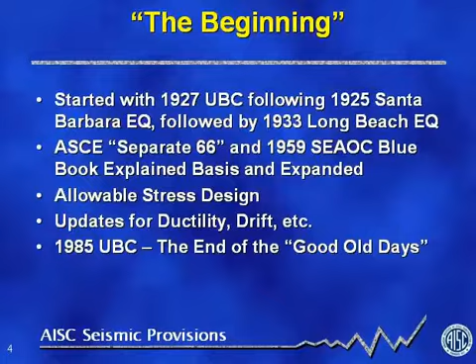So the beginnings: the 1925 earthquake in Santa Barbara came on the heels of the Great Kanto earthquake in Japan, and that led to the first Uniform Building Code in 1927. The California Chamber of Commerce actually wrote a structural code at the same time, which I thought was quite interesting. I wonder if the Chamber of Commerce would be interested in such things today.

The next earthquake was the 1933 Long Beach earthquake, which did severe damage to many school structures. It led to statewide laws in California called the Field and Riley Acts, the first documents making prescriptive requirements on the design of specific types of buildings, namely school structures. There were also the rudiments of codes developed in San Francisco and Los Angeles around that time.

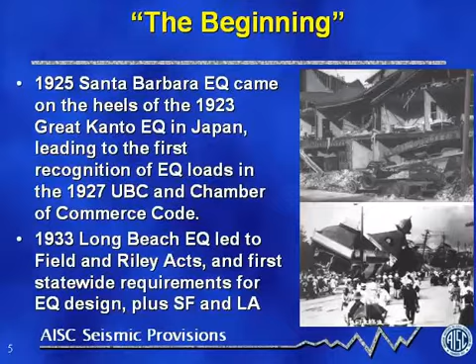The first base shear equation, from the 1937 UBC: basically, you designed your structure for 2% of the weight of the building if you were on hard soil, and 4% if you were on soft soil. And that was it.

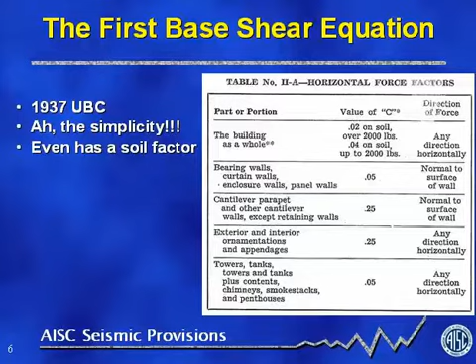Wouldn't that be nice? The other thing I liked in this is that it recognized higher forces on wall elements, cantilever parapets, and the like. And even those non-building structures had their own place in this first table.

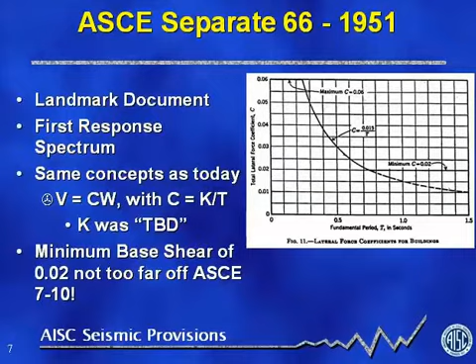And I was interested to see that they did put in a minimum base shear and said that no structure should be designed for less than 2% G. And believe it or not, we've sort of come back to the future in ASCE 7-10, and we also have a minimum design shear that's not too far off of 2% G, although certainly the shorter period part of the spectrum is much higher than this one shown in Separate 66.

So then we moved to the SEAOC Blue Book, which for many years has been a great resource guide to the reasons why the code is written the way it is, and the background for it - a kind of commentary. In the 1959 Blue Book, the first set of K factors was written into that document, and that gave us the design forces that we could use.

Bliss here was there's only 4 different factors. Right now I think we have 85 different system definitions in the building code. But then you just needed to know if it was a box structure, a frame structure, a dual system, or a ductile frame structure. That was it. And those non-building structures had their own category as well. So again, very simple, easy to determine which kind of system you had.

There were some height limits put in there to try and make sure engineers didn't go beyond what people felt were standard approaches. This was the first time that any ductility provisions were put into documents like this, so ductile moment frames were described in this document. But there were no drift provisions, so we weren't thinking about deformation yet, still just all force.

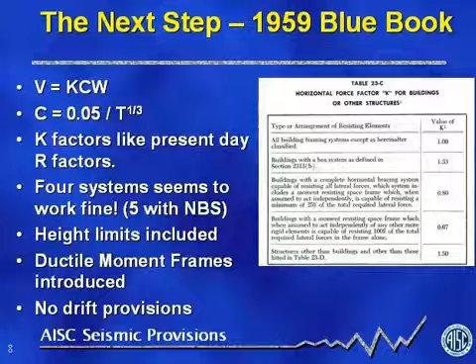So now we'll talk about a 25-year period between 1961 and 1985. Updates to the code basically brought in more and more detail to the base shear equation. We started to come up with national maps that defined the seismicity. And then in 1976, we started to see an importance factor for the first time.

This recognized that some structures we would want to be operational after an earthquake. So this may be the start of performance-based earthquake engineering, when we started to define not just life safety as our intent, but trying to define some structures that would be operational after an earthquake. We also brought the soil factor back out into the front and center of the base shear document.

And this was the first time that we introduced drift. Early on it just said 'per accepted practice' - wouldn't that be nice? This is my accepted practice for drift control. Then they started defining it as 0.005 times the height, and then using 1 over K depending on if you had a ductile structure or a more rigid structure.

Again, the length of the code then for seismic design was 13 pages, and that was on a small print document or small size document with large print. So you could learn that within a few days.

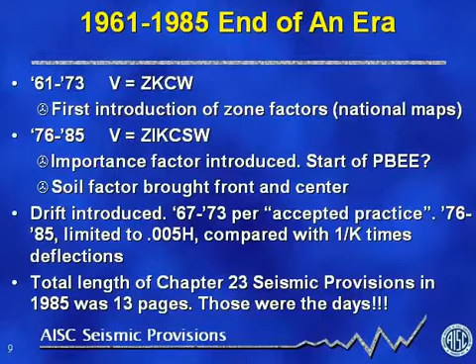In 1985, there were a couple of pages on steel design in the Uniform Building Code. There was one sentence that said, for brace frames, the only thing you had to do besides designing it using the AISC procedures was to multiply your brace frame connections by 25% over what the member was designed for.

Again, trying to recognize the start of recognizing that connections shouldn't be the place where we get failures in steel structures. Ductile moment frames had one page. We had some definitions on what materials were to be used, what to do about plastic design, the concept of designing for full capacity of the members and the connections, or demonstrating a ductile displacement connection approach. There was another about half a page on non-destructive evaluation and testing, so recognizing the importance of quality control in those structures, and that's it.

Now 1985 isn't that long ago. It's only 25 years ago, but as I think you'll see in the next set of slides, we've come a long way since then.

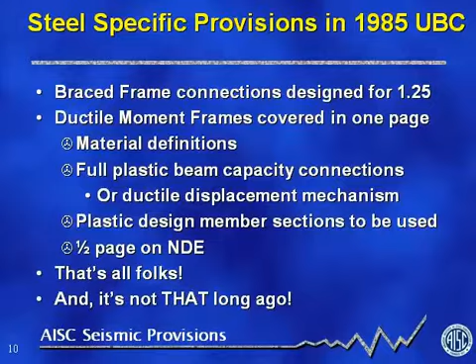So we'll talk about the recent past then, the last 20 or 25 years or so. ATC 3 was the landmark document that came out in the late 1970s that sort of set the basis for all the modern codes we're working with today. And we can trace back the majority of what we've done to ATC 3.

The 85 NEHRP provisions developed by the Building Seismic Safety Council and the 88 UBC started to incorporate that information into their documents. We switched from allowable stress design to a strength design basis. R factors replaced K. We started to put in uniform hazard for ground motions, and then started this proliferation of system definitions. This is when that all started to jump into the fray, with the idea that we needed to be very specific about our different systems and the kind of performance we wanted to get out of them.

This was the first code where a capacity-based approach was introduced, and that was for the eccentric brace frame system, where we had a rational approach to making sure that we could follow a capacity design, and I'll talk a little bit more about that as we go forward.

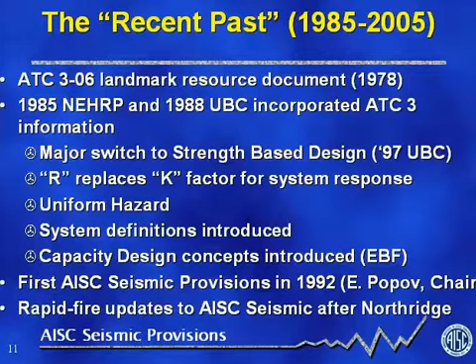In this time frame as well, as Charlie mentioned, AISC put out its first edition of seismic provisions as seismic sort of made its way across from the West Coast to the rest of the United States, and Professor Popov was the chair. After the Northridge earthquake, we sort of rapid fire tried to update the provisions as quickly as possible. We actually made three updates between 1997 and 2000, and then another edition in 2002.

So we were trying to update a lot of the research that was going on, the testing and the development of new information, and get it in the hands of practitioners as quickly as possible so that we wanted to make sure that you were doing the best job that you could as soon as possible.

We now are fortunate, I think, that we have one set of provisions that covers the entire United States for seismic design. So in the old days, there were three kind of competing codes, and there were different standards, and people did things differently. Now, if you're designing a seismic structure wherever you are in the United States, you're pretty much going to be using the seismic provisions.

So let's get into the meat of the presentation then, and that's the 2005 and 2010 seismic provisions of AISC. As I mentioned, 341-05 is incorporated into the 2006 and 2009 IBCs, as well as ASCE 7-05. We just completed ASCE 7-10, and that'll be in the 2012 IBC.

In the slides that are coming, what I'm going to be showing in white is what's in the 2005 provisions, so that's what should be on your desk right now. And then in that goldenrod color, it will be what I call the coming attractions of the 2010 provisions. So trying to get you to think about a little bit of what the committee was working toward to try and improve the provisions the next time.

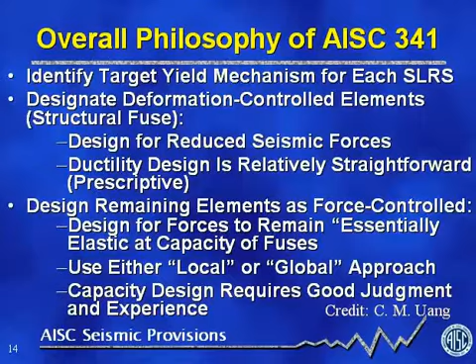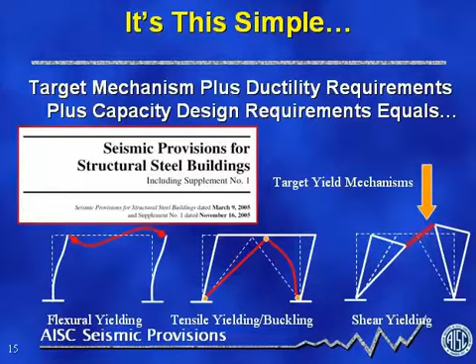Okay, let's go through and summarize the basic elements of the 2005 provisions. It's broken up into two parts. The first part covers structural steel. The second part covers composite construction. It's generally intended for seismic design categories D, E, and F. And if you hopefully work with ASCE 7 as well, that's sort of the areas of higher seismic demand throughout the country, depending on occupancy and location, etc.

It's very well coordinated, we think, with ASCE 7-05. We've tried to bring together all of the research that's come out of the FEMA SAC project to make that happen. One of the things, parallel to AISC 360, we put this into what we call the unified specification format, where both the load and resistance factor design and now allowable strength design are both in the same location. So we've got those into one set of provisions, so you don't have two sets of kind of competing provisions.

Talk a little bit about the major changes for 2010. We've reorganized the document to be more consistent with AISC 360. So you'll see parallels when you're working with the main specification and AISC 341 that you probably wouldn't have seen previously. One of the major things I think that's going to help with some of the transparency of the document is the system definitions and approaches, and the way they're dealt with are very consistent for each of the systems. I'll get into that in a little bit.

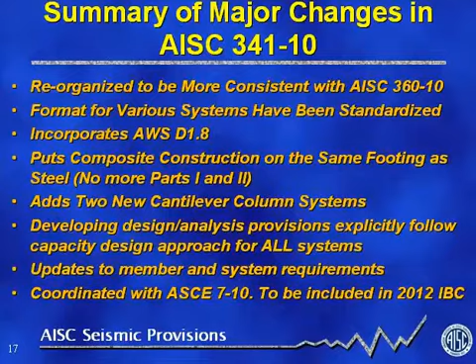Okay, let's talk about the scope and general requirements. It's generally intended and developed for buildings, but we also have language that talks about it being applicable to building-like non-building structures. What that means is structures that have vertical frames and horizontal diaphragms that deliver load to vertical frames in a way similar to buildings. There are other structures it doesn't apply to, like transmission towers and tanks, which you have to go elsewhere to deal with, even though they do have steel in them.

There's a glossary that develops the concepts of the entire system. It's not just the vertical frames, but also horizontal diaphragms delivering seismic load into those frames, collectors and chords, etc. In seismic design categories A, B, and C, the lower seismic zones, if you had to design here in Florida for seismic, you're in seismic design category A. If you wanted to use AISC seismic, you could, but you also have the choice of using the main specification with an R equals 3 and not going through all the provisions I'm going to talk about here.

In most cases, I think that's going to be the wise choice. The benefit of using the seismic provisions in categories A, B, and C is that you use a higher R factor, so your force levels are lower, and potentially your member sizes are smaller, but not necessarily a cheaper structure to build. In 2010, what we did in the scope area was develop clearer documentation about how we coordinate between ASCE 7 and the seismic provisions.

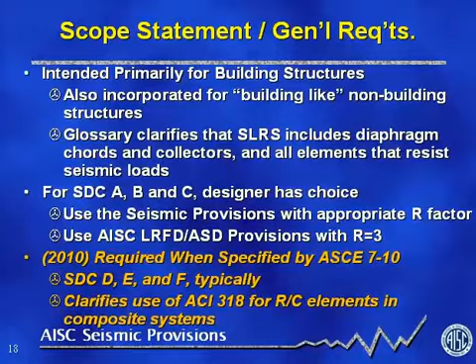We're clarifying the use of ACI 318 for composite systems that have reinforced concrete elements in them. On general design, we refer to ASCE 7 for height limits, seismic design categories, story drifts and the like. In the 2010 provisions, we did a better job clarifying how to use the amplified seismic load provisions that you have to apply in certain elements of the system, to make sure we get that capacity design approach taken care of.

We also talk about how to approach the required strength on every element in the system, whether it's required from the analysis of the system based on ASCE 7-10, for your ductile elements, or if it's from the capacity-based design approach where you define a capacity of your ductile elements and then apply it to the rest of the system that's supposed to remain essentially elastic.

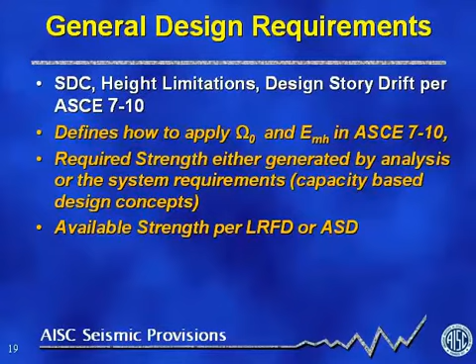And then some more definitions on how to apply LRFD and ASD.

One of the things that was a major step forward in the 2005 provisions were the requirements on project documentation. This was an area that AISC 360 has now followed up with in the 2010 edition in their Chapter N. The idea that we really need to do a better job of documenting, whether it's a design drawing that I put together as the engineer of record, or the shop drawings that the fabricator puts together to validate that he's understood the intent of my design. Same thing for the erection drawing.

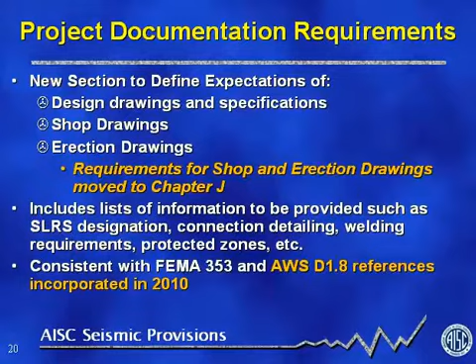So there's a specific list of items that need to be included in the various documents to make sure you've covered everything in your presentation, so that hopefully that will eliminate any misunderstandings between the various parties, or as many as possible, and hopefully improve the quality of construction that gets put into the field.

So let's get into the spec itself, talk about the materials. Basically, any material that's covered in AISC 360 is pretty much allowed in AISC 341. Steel is a ductile material, so we really haven't seen the need to put too many restrictions on the basic structural products. One of the things we have done, again, this concept of capacity design is so important to us, is that we need to work not just with minimum specified strengths, but expected strengths of steel.

So if you're a grade 50 material, that's a minimum. The expected capacity of that—the mills are going to make it a little stronger—so when they do their certification tests, they don't have to chuck a whole heat of steel.

Usually in most materials for structural wide flange shapes, the yield is maybe 10% higher than minimum, HSS maybe 30 to 40% higher than the minimum yield. We also use the tensile strength to get the expected tensile strength. The reason we need this is for defining the capacity of those ductile elements. We need the real capacity, not the minimum specified capacity, in order to properly design the rest of the system to make that fuse occur when the earthquake hits.

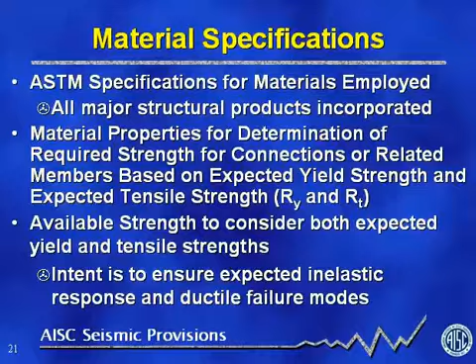So we talk about available strength, etc., trying to ensure we're getting ductile modes of failure. For heavy shapes and plates, we have requirements on Charpy V-notch toughness of the base materials, similar to what was developed in AISC standards for large truss elements in the 80s. It's a little more restrictive than those basic requirements for Charpy V-notch toughness on the thicknesses, but it's just something we need to check when we get to very large members.

In 2010, we expanded the allowed use of steel beyond grade 50 to grade 65, which has become more common in column shapes, etc. And then, referencing the AISC or AWS D1.8 for filler metals, we can now put that material all in their document.

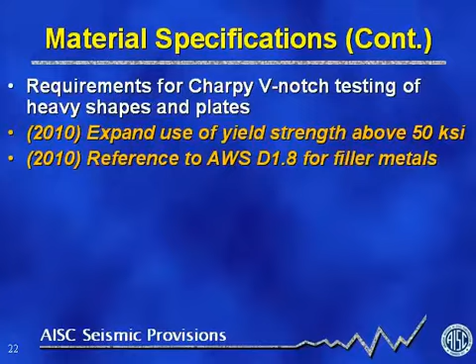So we'll talk for a couple minutes about connections and joints. In bolted joints, generally we're looking at fully tensioned high-strength bolts for Class A slip-critical preparation of the joints, but designed for bearing. So we're designing them for bearing but preparing them for slip-critical. You probably ask why would you do that? The idea is the recognition that in smaller earthquakes, we don't want a lot of slip in the connections, so that's why the slip-critical preparation, but recognizing that when we get to that major earthquake, the bolts are going to slip into bearing, so let's take advantage of that complete strength.

We also don't allow sharing of load between welds and bolts in the same line of action. This doesn't mean an entire connection can't have welds and bolts, just that if you have one force, you can't have bolts and welds sharing that force, because there's deformation incompatibility there that you'll never be able to add together at the same time. Generally standard size holes, although we can use oversized holes for braces to allow ease of erection and construction.

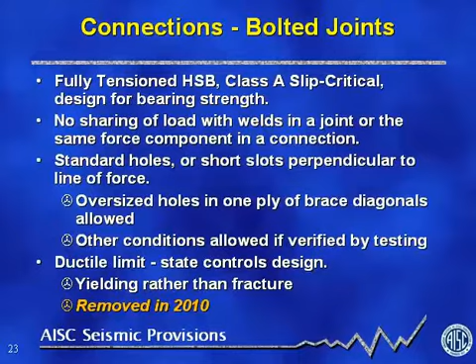In the 2005 provisions, in addition to designing the connections generally for the capacity of the connected member, we also required you, kind of a belt and suspenders idea, to demonstrate a ductile limit state. So when you went through and checked all your limit states, you couldn't have a fracture type limit state, you needed a yielding type limit state. This basically, in some cases, required even an additional safety factor on top of the capacity design. We've removed that in 2010, so we've actually made it less restrictive. We will do that if we think it's the right thing, and I think that will make it easier on many connection designs, especially those that use bolted connections.

Let's talk about welds for a little bit. In 2005, we didn't have AWS D1.8 yet, so we had an Appendix W that covered a lot of the material that's in D1.8 related to how we weld, what we do with backing bars, etc. We were able to incorporate that in 2010 using the AWS procedures. There's things about welding procedure specifications and continuity plate detailing, etc., that help us provide the ductility that we need.

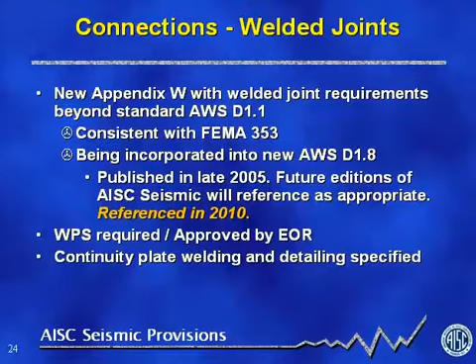Welded joints in seismic frames all have to have demonstrated toughness in their welds. Every weld in a seismic system needs a minimum level of toughness. Right now we're at 20 foot-pounds at 0 degrees. This came out of the FEMA SAC research. For very special welds, called demand critical welds, which are right next to areas of high inelastic demand, we require something called a demand critical weld. Those have two levels of toughness specified, one at 0 degrees and then basically 40 foot-pounds at 70 degrees, which again came out of the SAC research in the 90s, to demonstrate a level of toughness up at this sort of service temperature of the structure. That's now all taken care of in the D1.8 provisions in 2010.

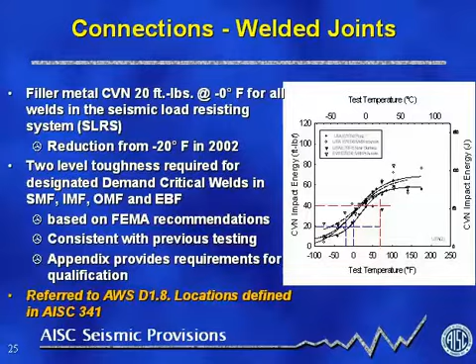The other part of welded joints I want to talk about right now is the protected zones. And again, think about those hinges I showed in the target yield mechanisms.

Those are the areas that we're going to be straining well beyond yield, 4, 5, 10 times yield strain in some of those locations. We need to make sure those are going to be there and perform for us. So what we've done is said these are like no-fly zones, if you will. You need to be careful not to disturb the steel in that area, let it do its job and perform with that ductility.

So we've said you can't have anything like an attachment for a curtain wall or shot pins for a metal deck. The only thing you can do is put in some small spot welds to hold down the deck for OSHA requirements. The figure in the upper right is the top flange of a beam tested at Lehigh with a composite deck, showing a fracture that went right through the entire top flange, right next to the shear connector that was placed inadvertently over the middle of the plastic hinge region.

So we want to avoid that if we can. And if you do end up with that in the field - and I think many of us who have done these kinds of systems have run into places where the plumber didn't know there was a protected zone and just went through and hooked something onto the structure - we have to work with the contractor on getting those repaired properly.

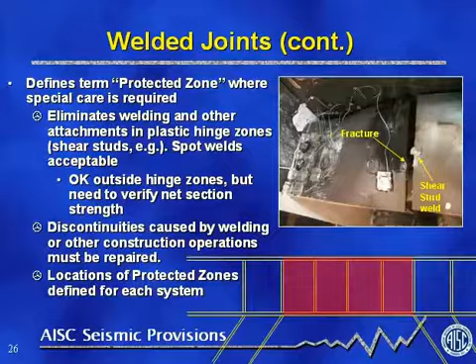Talk a little bit about members. The width-thickness ratios are often more strict than the main specification for members in seismic systems, and I'm going to talk about that with this slide.

This shows the graph of the moment capacity of a section as you go from right to left, from elastic buckling to inelastic buckling, and then peaking out with plastic buckling. Below you can see a chart of ductility and how that varies with the width-thickness ratio of the member.

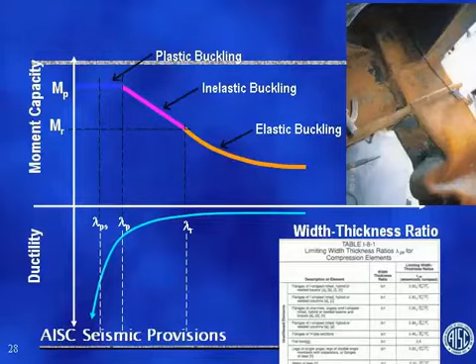So with seismic design, in those ductile elements, those deformation-controlled elements, we're really focusing on pushing ourselves as far as we can down the ductility curve. So we use lambda PS, which is less than lambda P, the plastic limit, the break point between plastic buckling and inelastic buckling. We use three different levels in the seismic provisions to recognize that.

In 2010, to try to make it more transparent, we came up with the terms moderately ductile and highly ductile elements. Your highly ductile elements are going to be in the high ductility systems with the high R factors - those elements that are going to be plastic where the plastic hinges are. So beams in moment frames, link beams in EBFs, braces in special concentric brace frames - those sorts of locations.

The moderate ductility elements are going to be part of maybe the capacity-designed elements in the higher ductility systems, and the yielding elements in the low ductility systems like our ordinary systems - I'll talk about that in a bit. We also use those terms to flag the bracing requirements, the lateral bracing requirements, to make sure we have stability of those elements, as well as the ability to form the local plastic hinge. We've incorporated new sections in this 2010 provision for HSS and box-shaped flanges, as well as composite elements.

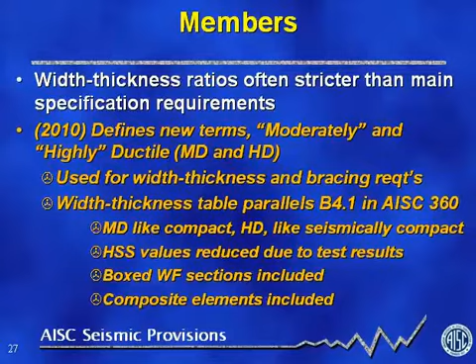The provisions also now have a small section on diaphragm design, which we hadn't dealt with in the past, making sure we're properly coordinated with ASCE 7 and ACI Chapter 22, to make sure that load transfer from the horizontal elements to the vertical elements is properly taken care of.

I mentioned bracing requirements are now uniform across the systems. This sort of fell out of every system being defined very specifically and consistently - we were able to nicely make sure we were consistent on the bracing requirements. In 2005, and this goes way back into the provisions well beyond AISC seismic, columns with high axial load were checked for amplified seismic loading conditions.

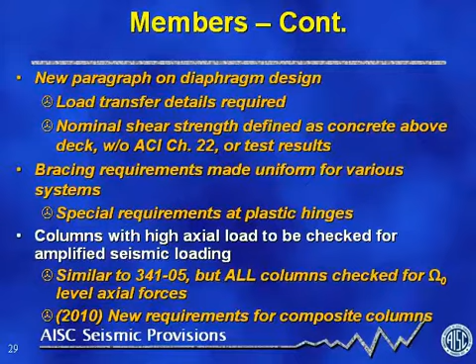In 2010, we've actually said just check the amplified loading conditions for all columns. It comes out of the computer, it doesn't matter, all the load combinations are there, just go ahead and do it that way. It's not going to change the design any. We also have those requirements included for the composites.

Column splices and bases are a very special category of connections. Obviously, one of the things you really want to avoid is any kind of column fracture or splice fracture, because if you lose one of those, you could lose a whole building with just one connection breaking on you. So it's something we were intentionally a little more conservative about than other elements in the system because of the ramifications of possibly losing one element or one connection. So we've got some very strict requirements about the use of partial penetration welds and the forces those are designed for, how you transition the welds, etc.

The other unique requirement on column splices is that all columns in the building are covered by this element. Even if it's just a gravity column, we have a requirement on the design of the shear connection of those splices to make sure that we have continuity up the height of the column. This is the only place where we deal with the gravity columns, or gravity system at all, in the seismic provisions. And the reason for that is what we found from a lot of nonlinear time history analysis is that if you incorporate or include that resistance of those columns and their continuity up the system, you get an additional strength and stiffness. It's low, not very big, but you do get an additional strength and stiffness that's not included in your design. What we found from these nonlinear analyses is that just that little additional strength and stiffness will help you to avoid weak stories where you concentrate all the inelastic demand in one floor, and you're able to better spread the load through multiple stories. So that's why that provision is in the code.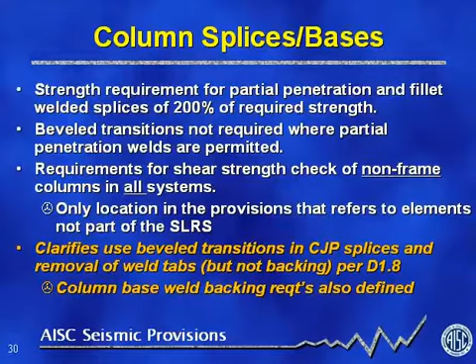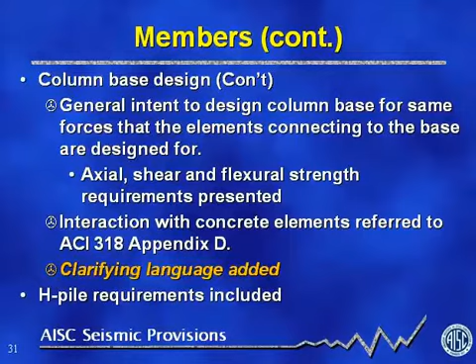In 2010, we've worked on clarifying the language a little bit and referring to D1.8, as I mentioned, and talked a little bit about column base welds. Column bases are another important design consideration. Basically, here it's fairly simple: we want you to design the base connection into the foundation, or the connection to the foundation, for the same force that the member above it is designed for. So shear, moment, axial force. This is where the interaction with ACI 318 Appendix D occurs, and there's some clarifying language there.

Another new provision in 2010 highlights the need to verify deformation compatibility of the gravity system - the ability of the gravity system to go through the drifts that we designed the building for, and make sure you don't lose gravity capacity at the design story drift. This was put in large part to include a user note, which is not part of the code, but should help engineers understand that basic shear tab connections in our steel systems have been demonstrated to go through very large drifts. So you don't have to do lots of calculations or justification in a steel building to make this provision work. But we wanted to highlight that so you didn't run into a plan checker asking where's your deformation compatibility check. Now you know all you have to do is say there's test results for shear connections showing more than enough deformation compatibility in my gravity frame for steel.

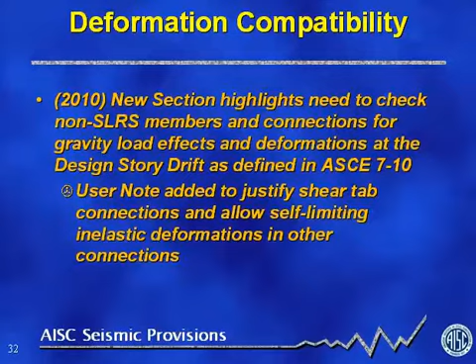Before talking about the systems, I'd like to talk about the formatting we've done in 2010, because I think it's going to help clarify and make more transparent the system definitions and the ability to compare systems across as you're trying to decide between an eccentric brace frame, a special concentric brace frame, or a buckling restrained brace frame. You'll be able to compare the different system definitions line by line and then make a rational decision. So there's a scope definition, a basis of design - this is where we're defining our yield mechanism and our protected members, or ductile members, our fuses. There's some information about the analysis you need to do. System requirements - this is lateral stability bracing, system-wide requirements, force deformation demands, the B over T limits for members, ductility provisions, protected zones I mentioned before, and then the connections - obviously a key element of any seismic design, defining the demand critical welds and splices, etc.

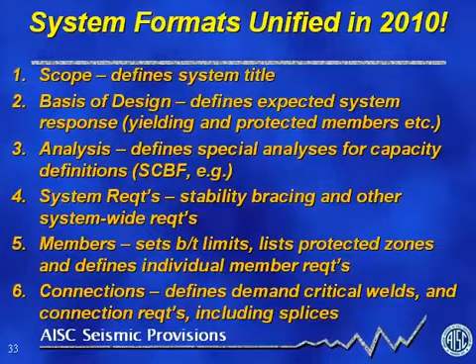The other new chapter in 2010 is a very short chapter. It's more of a placeholder - I think over time it may grow as we develop more definition here. It's on analysis. We've got some very short definitions about what section properties should be used for both steel and concrete in the composite elements, and it has a pointer to the demands or design requirements for the systems related to analysis.

There's also a pointer to ASCE 7-10, Chapter 16, which has had a major update related to nonlinear response history analysis, that when you do choose to do that in your seismic design, you're supposed to use that set of provisions to go forward with.

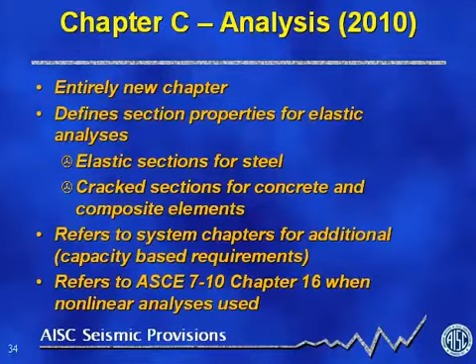So let's talk about special moment frames. We'll go through the systems now. Basically, this was the hot element after the Northridge earthquake, with the damage there. We now have provisions that require tested results on our connections there, generally to 0.04 radians for drift.

There's 3 different ways of making that happen. Either you test it for your project, or you go through an appendix pre-qualification, or you design them in accordance with AISC 358, which I'll show in a second, is a new standard that pre-qualifies a number of connections, and then you won't have to go through any additional calculations. In addition to the moment design of the connections, we need to develop the shear connection at the moment frame joints to develop those full plastic capacity of the beam at both ends.

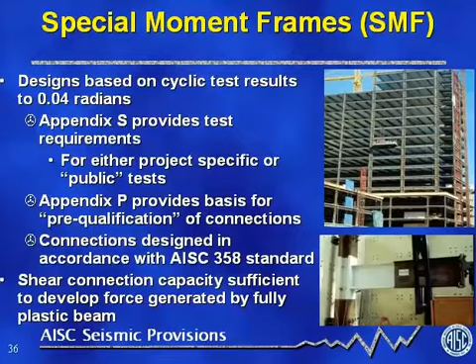A little bit about that pre-qualification standard, titled Pre-Qualified Connections for Special and Intermediate Steel Moment Frames for Seismic Applications. Ron Hamburger is the chair of the committee that develops that, and we work closely with Ron to coordinate what they're doing with what we're doing. It allows you as an engineer to pick a connection out of that document that's within their limitations of height and size and thickness and plates and the like, and submit that with no further calculations except what's required in their document to justify your design.

They're just about completed with their 2010 edition, which incorporates additional connections beyond the reduced beam section and end plates that were developed for the 2005 provision. And they're continuing to work on a number of other connections over time to get pre-qualified to make it a little easier on us.

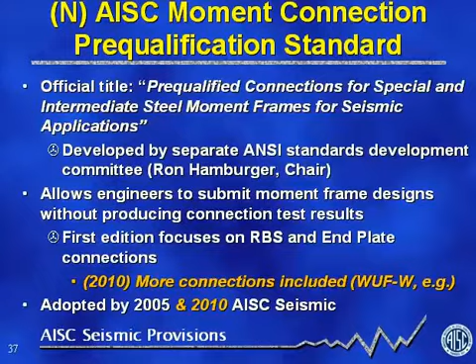Other elements of special moment frames that are important to the design, first is obviously the panel zones. We want those to be as ductile as we can be. The provisions are intended to balance the yielding in the moment frames and get some panel zone yielding as well as beam yielding. We want to spread the yielding as much as we can to take advantage of the ductility of the steel.

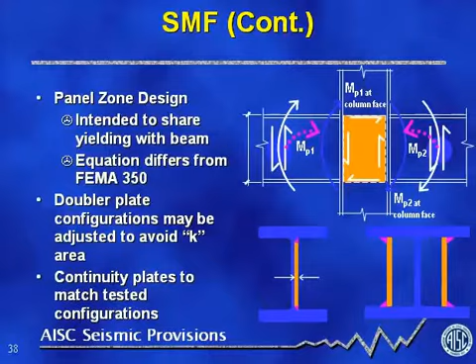So there's requirements on how you calculate that, how you put together your doubler plates, either against the web or separated from the web. And there's detailing requirements that tell you how to provide that ductility of the system.

Another major element for special moment frames is our strong column weak beam check, again wanting to avoid weak stories that are going to concentrate the inelastic deformation in one story. We check that on a column by column basis, so it's sort of an indirect check of weak stories. In 2010, we've done some clarifications to the language to make sure that you check the columns and reduce their capacity for bending by the axial force induced by the amplified seismic load.

So again, if you're doing that for 2005, you may want to think about the fact that the axial force in that is going to be higher than what comes out of the standard building code requirements.

Column splices in moment frames, we've really pushed toward CJP welds, complete joint penetration welds. The reason is the little graphic at the bottom left is sort of a simple portal frame where the inflection points are sort of near mid-height of each story. And your splice usually is going to be a couple feet below that, so you think, well, maybe the demands on those splices are not going to be that great. Why would you need complete joint penetration welds?

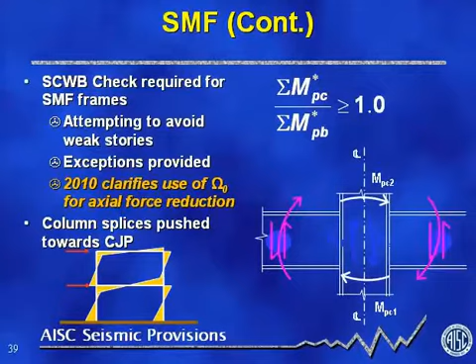Well, what we found, again, from these nonlinear response analyses is that in real ground motions, the plastic hinge is moving up and down within a story kind of all over the place during the ground motion. In some cases, you don't get any plastic hinge over a full column height, so in those cases you could get quite large moments approaching the full capacity of the column. That's why we've been fairly conservative, again, because of the potential impact of losing a column connection.

Lateral bracing of beams - obviously, if we're really pushing these moment frames hard and wanting to get a lot of ductility out of them, we need to recognize that we need to brace them laterally so we don't have any stability issues. So the requirements are for both bracing along the length of the beams as well as at the plastic hinges.

The force at the plastic hinges is quite large, about 6% of the capacity of the flange. So think about AF, AS, FY on the flange and multiply that by 6%, then try and push that back into your diaphragm - it's something you can't ignore. It's a big number. You need to keep connections out of plastic hinge zones.

Unfortunately, that wasn't properly communicated by the design engineer. They put the lateral brace right in the middle of the plastic hinge, so not really the best idea, especially since it's a protected zone area.

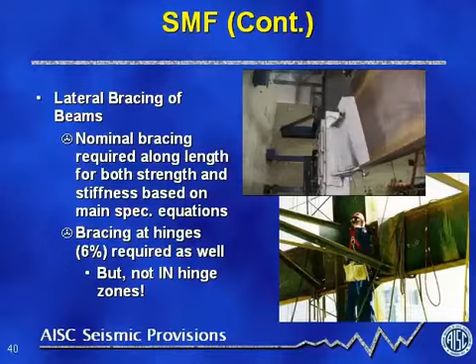Generally, you want to move those lateral braces about one flange width beyond where you think the end of the plastic hinge is. The other couple of standard moment frames are intermediate and ordinary. The provisions on those are less restrictive, primarily because the code doesn't allow you to use those in all applications.

So there are height limits and weight restrictions on those structures. We reduced the connection requirements for the intermediate down to 0.02 radians, with moderately ductile members instead of highly ductile, which we use for special moment frames. We now require demand critical welded splices, again for the reasons I've mentioned.

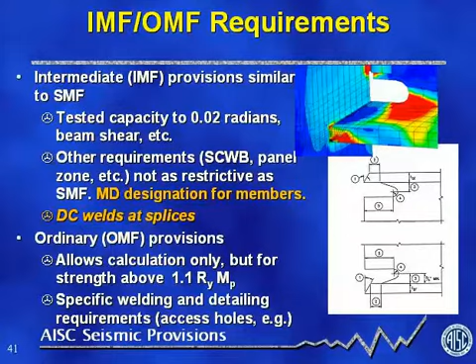Ordinary moment frames you can actually use without any connection tests, so you can do it by calculation. Again, very limited applications for those - one-story buildings, very light buildings generally. If you don't use connection tests to demonstrate your capacities or deformation capacities, we have a set of detailing requirements that includes access hole configurations like the one I showed, which will help avoid premature fractures in those connections.

Another moment frame is the special truss moment frame, conceptually very similar to eccentric brace frames, with the ductile special segment shown in the middle of the bay, the frame on the upper right. You can do it a couple different ways, whether it's a crossed diagonal with light plates or a Vierendeel approach. We've limited the application of these, based on tests, to spans of about 65 feet and truss depth of about 6 feet.

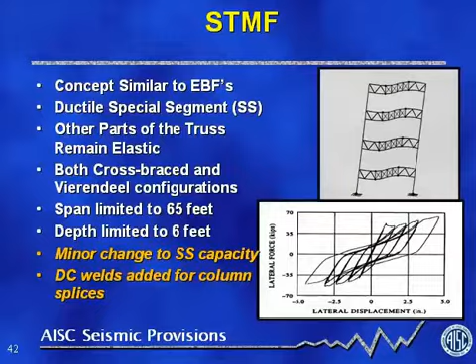We've added 2 new systems to the document, short additions for cantilever columns. These again came out of ASCE 7-10. There have been cantilever column requirements or definitions in ASCE 7 in the past, but we haven't really dealt with it in AISC. We felt it was important for clarity to do that now.

So we have an ordinary and a special system, with requirements on axial loads, B over T limits, and connection demand requirements for the special system. Pretty simple if you do have those cantilever type column structures.

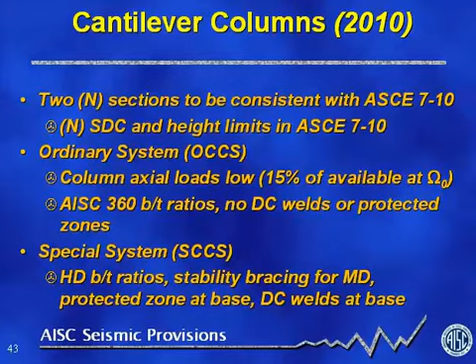Let's talk a little bit about brace frames. First one is special concentric brace frames, which is a fairly ductile system, usually in the R=6 range. There are some basic requirements for KL over R to make sure we've got good stiffness in our braces, but not too stiff. B over T ratios are quite strict on the braces, since those are our ductile yielding elements.

And there are connection requirements - obviously we don't want the connections to fail, so they're designed for the tensile capacity of the sections. We've got requirements on chevron and K-bracing. Basically, we don't want K-braces where the braces come into the center of a column between floors, because of the potential out-of-plane force that could be induced into the columns.

The chevron braces are shown on the lower right there, and the idea is that when the compression brace buckles, the tension brace still wants to pick up additional force because it hasn't yielded yet. So there's a downward pull on those beams, and there are requirements in 2005 about how you design the strength of those beams to take that unbalanced force from the compression and tension braces.

In 2010, we actually put in this 2-level analysis, which I'll talk about in a second, and increased the requirements on the connections at the brace frames. The reason we've done this is that we recognize, from analysis of these systems, that the real rotations and displacements you're going to see in these connections are well beyond the elastic level - we're talking 2-3%.

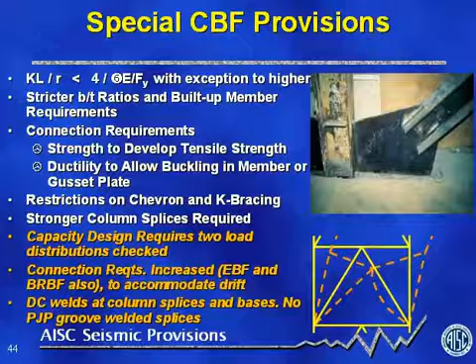And again, we've upped the requirements on demand critical welds on the column splices. So let's talk about this new analysis requirement, because I think it's an important conceptual thing to think about when you're thinking about concentric brace frames.

In the past, you would only have been required by the code to look at the analysis distribution of forces on the left, where you're elastically analyzing the frame for the forces that come out of the building code, and in compression and tension, basically the forces are going to be very similar. So if you looked at a 2-bay brace frame like this, it would tell you that there's no axial force in that center column, and no uplift on that center column, maybe in your foundation.

But think about the reality of nonlinear inelastic design for seismic. If we do overload those braces, we're going to buckle the compression braces, and those tension braces are going to try to continue to pick up load and continue to resist that force and resist the displacements. So what we've done is said you need to also do an analysis that recognizes that after buckling of those braces, you're going to get a reduced capacity in compression for those braces. And you're going to get this unbalanced force at the various locations where braces intersect.

So the residual capacity of those braces we define as 30% of the original compression capacity, and that's based on a lot of test results and looking at the kind of requirements that we put on KL over R and B over T. So in that case on the right, now you look at those unbalanced forces, and now you have quite large forces in that center column. And the distribution of force is completely different, not completely, but very different from what it is on the left if you take the forces through the entire frame.

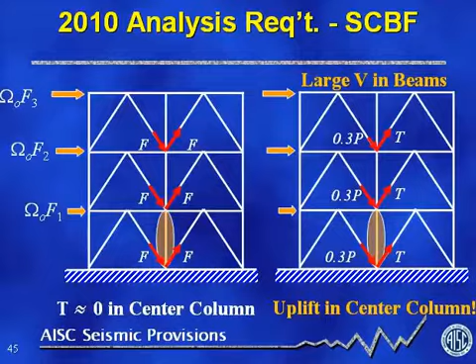Okay, we'll go to the less ductile brace frame, ordinary concentric brace frames. These are limited for use in high seismic design categories. Again, low-rise systems, 1- and 2-story buildings primarily.

Connection strength is generally based on the amplified seismic force. We've gotten some clarifying language in 2010. There's restrictions on compression or chevron bracing similar to the special frames. We do allow tension-only braces in some applications for these systems, and that will allow you to do penthouses and the like with rod braces if that's appropriate. And again, no K-bracing is allowed in 2010.

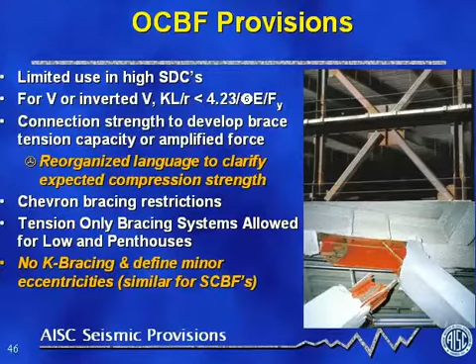We also define that you can use minor eccentricities in the connections if that's going to make the connections more efficient, but obviously you'd have to take those eccentricities into account in the member design.

Eccentric brace frames, again, I mentioned a couple times, primarily done using a capacity-based approach. Identify those link beams, design the braces and columns to remain essentially elastic for those capacities. Generally, you're going to be using shear links, links that yield in shear, and they're going to have some pretty extensive stiffening requirements, again, to provide the ductility that we think we need.

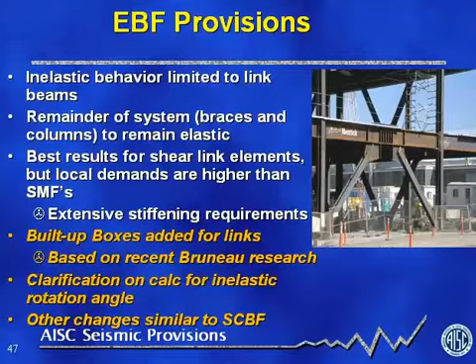In 2010, the big changes were to bring in some work that was done at the University of Buffalo by Michel Bruneau on built-up boxes, and to clarify some of the calculations that are done for displacements in the system, and some of those similar changes on column splices.

In the EBF provisions, we also have requirements on connections where the link is adjacent to the column. We sort of frown on that because you are going to get some very large demands there if you do have to bring your link into the column, like the slide on the upper right, or the picture on the upper right. Generally, we're requiring that you have connection tests to demonstrate your connection. Otherwise, you're required to basically stiffen the connection so much that you're basically pushing the link away from the face of the column to avoid any kind of fracture.

The beam outside the link and the columns need to be designed for the capacity of the link and strain, including strain hardening and that expected yield strength I talked about earlier. For the braces that are connected to one link beam, those are required for a strain hardening factor of about 1.25. Columns, shown graphically on the lower right, are designed for a strain hardening factor of 1.1.

So the column at the base, where it says PU, has to be designed for all three of those links yielding and strain hardening to 10% over their expected capacity simultaneously. That's going to create quite a large load. It's probably very conservative as you get into taller structures. For short structures, it seems to work fairly well to look at it this way.

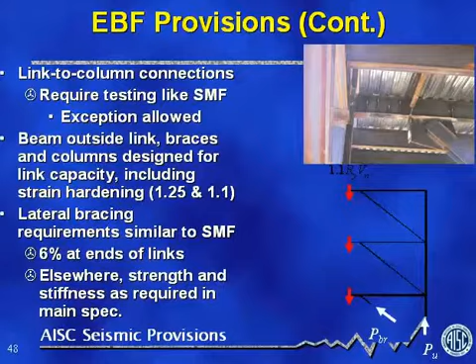Again, lateral bracing - this is a high ductility system, so we are going to be bracing laterally. At the ends of links, you get large demands like at plastic hinges and columns, so we have that 6% limit again, and then you also have a stiffness requirement as well as strength.

A new system in 2005 was the buckling restrained brace frame system. It improves on special concentric brace frames because it provides a ductile brace response, so we aren't going to get that reduction in capacity on the compression side. The concept is that the brace is within a stiffening element so that when it wants to buckle, it is restrained from that buckling by the collar around it, if you will.

If you look at the graphic on the upper right or the slide on the lower right, you can kind of see what that looks like. It was developed in Japan. They traditionally use it there more as damping elements than braces. We've chosen to use them as braces in the U.S. You basically can get hysteretic behavior like perfectly elastic plastic material.

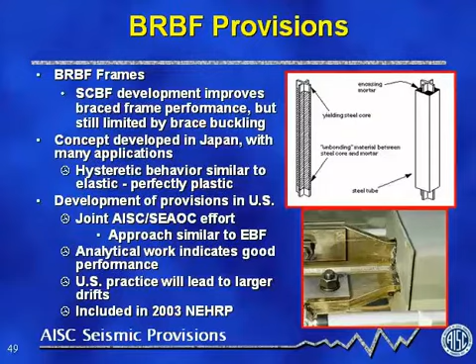This was developed in joint efforts with various committees like AISC and SEAOC and put into the 2003 NEHRP provisions as well as the 2005 AISC Seismic. Because those steel cores are such important elements, we require that they be demonstrated and tested for twice the designed story drift. There's an appendix in the document in 2005 that tells you how to do that.

There are a number of exhibitors downstairs that provide these braces where you can learn more about how that's done. It's actually interesting that in compression these braces are actually stronger than in tension. There's a little bit of stiffening that goes on in the core, so you actually need to design the compression capacity a little more than the yielding capacity in tension.

The nice thing about them is you don't have to oversize your braces for compression, so your foundations can get smaller and columns can get smaller, and you also don't have that unbalanced force effect with chevron braces because you don't get that buckling and reduction in capacity in compression.

Again, like the special concentric brace frames, in 2010 we increased some of the connection requirements for drift and the demand critical welds on the column splices.

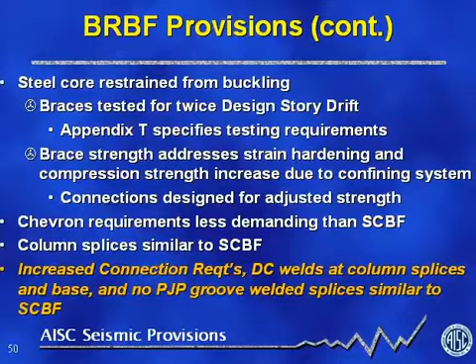The other new system in 2005 was special plate shear walls. This initially was developed in Canada. It's been in the Canadian code for a number of years based on research all around Canada by Jeff Kulak and some of his colleagues. It's also been studied at UC Berkeley.

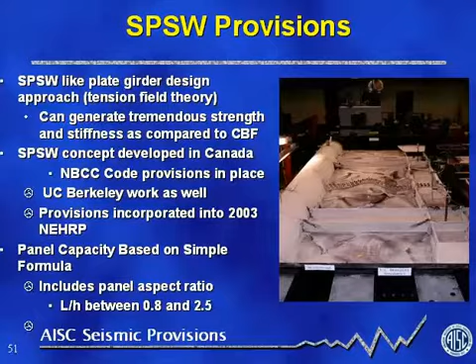The idea here is that you're sort of getting almost like a plate girder approach, very thin plates in relation to the size. They're going to buckle as this test specimen did here on the right. We required some panel size definitions in the 2005 provisions to make sure it was consistent with the tests. We also require that you put boundary elements around any openings to make sure that you're getting yielding and ductility in the plate and not in the surrounding elements.

We require that the connections of those plates to the rest of the system develop the full capacity of the web plate. And in a similar conceptual approach again for this capacity design approach, there are lateral bracing requirements for the beam. Again, you're going to get some ductility and out-of-plane deformation demand, so the strength or stiffness is needed in your braces.

In 2010, we added a couple of new elements based on some research on perforated webs and webs with corner cuts. At the corners, we saw a very high stress concentration, so there's some ideas for having a semicircular corner cut to avoid that. Perforated webs allow you to keep the capacity down.

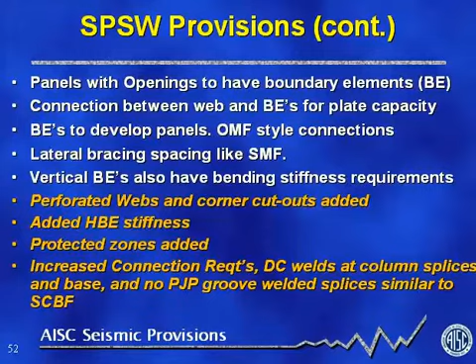We found that at reasonable plate thicknesses, you're going to get such large capacities that it really ends up oversizing the columns and beams in the system in order to get the base shear capacity. So the perforated webs help to pull that back down to a reasonable level. We added some protected zone requirements next to connections, and again, similar things on the demand critical welds at the splices.

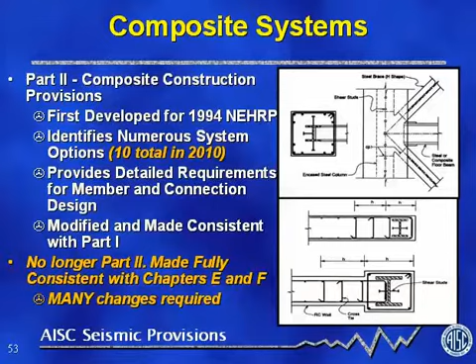Unfortunately, I don't have a whole lot of time to talk about composite systems. If you were here yesterday afternoon, Jerry Hajjar gave a very nice talk on the new requirements for composite systems. There was a great effort to bring those forward into the 2010 provisions, and they're greatly updated. So if you're using composite provisions now, I'd recommend using the 2010 version because there's a lot more detail and it'll be easier to execute those designs than with the 2005 provisions. There are a number of different systems, again with the same ideas of capacity design of connections between composite elements and steel elements or concrete elements, etc. So check out those two areas.

On quality assurance and quality control - so now we've designed all of our systems and connections and done our best to implement all the provisions. We now need to make sure that gets properly put together in the field. So we put together an Appendix Q for quality, which develops a set of requirements based on a lot of the work done in the FEMA 353 project and documented in the FEMA 353 document in 2000. It calls for both quality assurance and quality control and requirements for documentation of different elements. It talks about inspection requirements and different types of inspection, whether we call it observe, perform, and document.

Observe is your sort of periodic type of inspection where the inspector needs to be there and make sure the welder's got things set at different times. It doesn't have to be looking over his or her shoulder all the time throughout the performance of the welding. Perform is more akin to continuous, although it's not intended to be absolutely continuous for every weld. That's listed for very special elements of the design, such as complete joint penetration welds, and the locations of non-destructive testing required for both ultrasonic and magnetic particle testing.

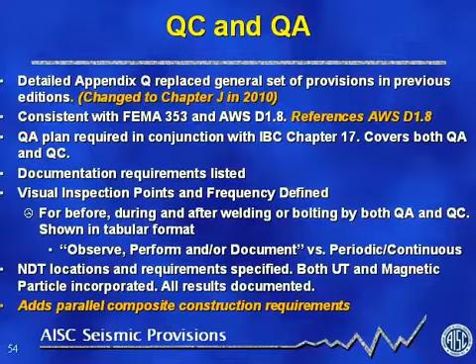We augmented this in 2010 with the provisions for composite construction, so again very parallel now. And I think, as I mentioned before, Chapter N of AISC 360 has followed this document in bringing quality directly into the AISC specifications.

So that's the provisions - we'll talk about where we're at. ASCE 7-05 is in the 2006 IBC. We're done with 2010, and it should be available shortly. Believe it or not, our first meeting for the next edition of the provisions is coming up in July. So if you have any suggestions or comments about the provisions now, please get them into us. We're going to be starting our next round of updates and hopefully improvements to the document, so we're always looking for your suggestions as users of the spec.

So let me spend the last 10 minutes or so talking about where we go from here, and some ruminations about things that I think are coming, maybe in the next 25 years. 1985 to 2010 is 25 years - some of these things are going to happen a lot more quickly, and some of them are already happening. But as we move forward with the provisions, maybe we'll be looking at this.

We're going to continue to improve the provisions - I call this sort of tweaking. So new things come up, we're going to change equations or change words to make things clearer, or we get new information from research or other studies. There's going to be expanded use of nonlinear response history analysis, both for demand estimation on our members as well as performance demonstration. I think there's also going to be a trend toward increasing demand for higher seismic performance of systems, not just basing it on getting one earthquake out of your building and then knocking it down and moving on. I think our owners and society are not going to be as accepting of that as they have been in the past, so this is only going to continue to happen more in the future. There will be new systems considered and new concepts for design that I think will be moving forward. So I'm going to talk a little bit about all those topics as we go forward.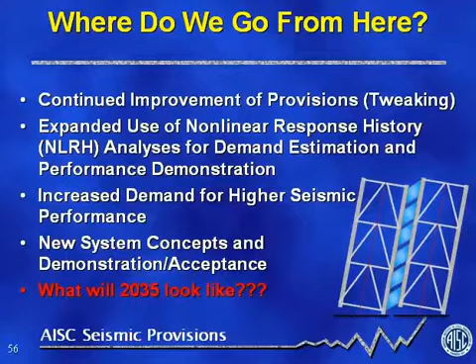A lot of the modifications and tweaking I talked about, I hope will help reduce cost. There's work going on now at AISC about column splice requirements and demands and column bases. Again, we've been fairly conservative with those, and we might be able to back off a little bit. We may also be able to better define what kind of disturbances in the protected zones you can leave in place and don't have to deal with.

We're also going to be looking at non-wide flange moment frames that might use HSS sections. That's some of the research our new research fellow is going to be working on. We're also going to have new research results on special concentric brace frames, gusset plates, and the like. Composite elements continue to be worked on - walls, eccentric brace frames, and CFT columns. I think we're going to continue to improve the provisions in those areas.

We're also working on improving the consistency of the reliability level and the safety factor, if you will, in our capacity-based approaches. What we've done over time is each individual system has developed its capacity requirements, not in a vacuum, but sort of individually, and we may not be very consistent about the beta factor or the safety level we're getting out of those designs. So we've stepped back, and Greg Deierlein at Stanford is looking at these systems and requirements to see how we can bring better consistency and overall reliability to our systems.

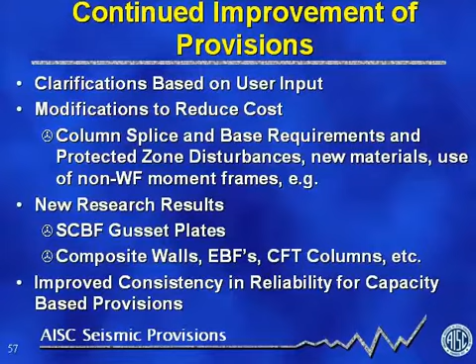This idea of expanding nonlinear response history analysis in tall building design has become very common for performance-based earthquake engineering, to limit the size of members and really understand the requirements. It's also been used pretty heavily in major seismic retrofits. You can do a much better job of estimating column requirements.

I mentioned this idea that in eccentric brace frames, if you had a 30-story eccentric brace frame and had to do 1.1 times RY in every link all the way up the building, well, those columns are just going to get humongous and probably not an efficient system anymore. The reality is once you get into systems that tall, you've got multi-mode effects going on, so you're not going to yield and strain harden the system simultaneously all the way up and down the building - you're really overestimating the load on those lower tier columns. So nonlinear response history analysis will allow you to get a better handle on that, limit your sizes, and make your systems more efficient.

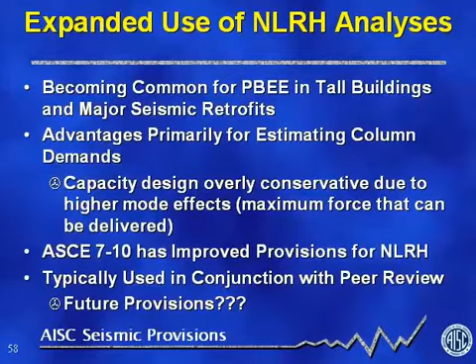There's improved provisions in ASCE 7-10 to help us with doing that, and generally these are going to be dealt with using peer review, since it's a fairly elaborate procedure to work through. Future provisions are going to be pretty hard to write in very clear terms that apply in all cases.

I mentioned performance-based earthquake engineering - it's on its way and being implemented in many locations and cases. The Los Angeles Tall Building Structural Design Council has provisions on performance-based engineering of tall buildings that came out in 2005 and 2008. The City of San Francisco has an administrative bulletin in that regard as well. The PEER guidelines from the Pacific Earthquake Engineering Research Center are also developing performance-based guidelines for tall buildings. These have generally been used for demonstrating equivalent performance of structures to what the code intends.

There's usually two levels of design that are checked: a service level at elastic forces or elastic response, and a collapse level for collapse prevention, where you're using this nonlinear response analysis to demonstrate you don't have a collapse issue. Also wanted to mention ATC 58, which is a major effort that FEMA is funding related to the comprehensive development of performance-based earthquake engineering.

I do think that owners will be starting to demand higher performance over time, more than they even do now. It's not going to be good enough, like I said, to just walk away from a building.

In Chile, there are a number of buildings that went through the earthquake a few months ago - some of them had only been in operation for a couple of months. Some damage to those structures, but the major problem is that they're leaning out of plumb, 1 to 2%. So you've got a 30-story building now that's leaning over like this. The idea of trying to push that back into place is a fairly daunting task. So you can imagine what the owner's thinking - invested all this money in this structure, and now it's the Leaning Tower of Santiago or something like that, and it has to be dealt with.

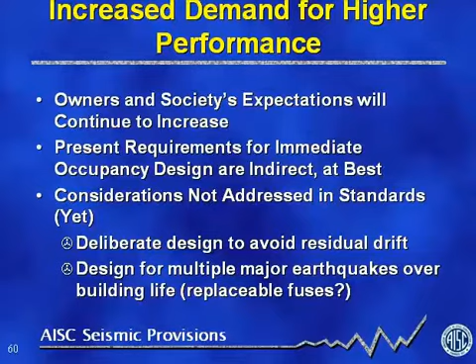It really doesn't get us to what we need for immediate occupancy. A couple things not addressed in any standards yet are how to deliberately design to avoid residual drift, so some mechanism that will help right your structure and bring it back to plumb after the earthquake. And what happens if your ductile elements get pretty beat up like you designed them to in the earthquake, and you can't use them again? In a lot of these systems, it's not going to be simple to pull out the eccentric brace frame links after an earthquake, so this idea of having replaceable fuses that you can swap out after the earthquake

and have it ready for the next 500 years or longer. What about systems that rock? Right now the provisions assume your structure is anchored to a foundation and you really can't take advantage of rocking. But rocking can definitely be your friend. It can limit the loads put into the structure, and generally earthquakes go in both directions, so it's going to pull you back if you lift off of the columns in your lateral frames.

Can we control that rocking, though? Obviously we don't want to let it get out of control and lead to overturning. How do we design the rest of the system above the rocking elements? How strict should those requirements be for ductility? Do we need much ductility if we're going to let it rock? And what's the impact on adjacent gravity systems? There's obviously deformation compatibility issues when you go from the lateral system that's rocking to the gravity system that just wants to move horizontally.

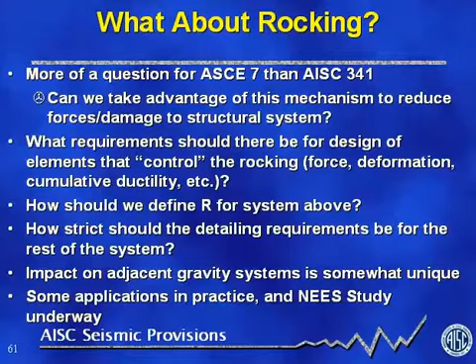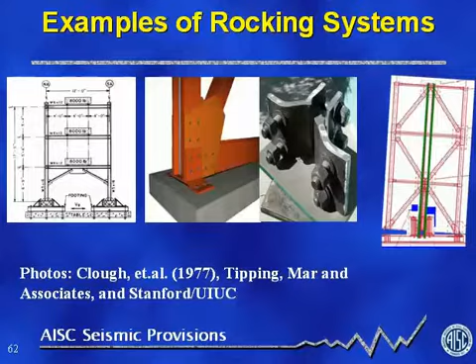When I talk about self-centering systems, this is the idea of possibly incorporating into our designs a mechanism that pulls us back to plumb after we've been pushed out of plumb by the earthquake. Luckily many earthquakes don't tend to leave many buildings out of plumb, but there's no reason that they can't.

We do have some limited ability to self-center in our structures, and gravity frames in steel buildings have an ability to self-center, like I mentioned before, but we never really calculate it, so it's hard to make sure it's going to be there when we need it. In some cases there may not be a lot of gravity columns in the system to help with that, so you need to be thinking about that.

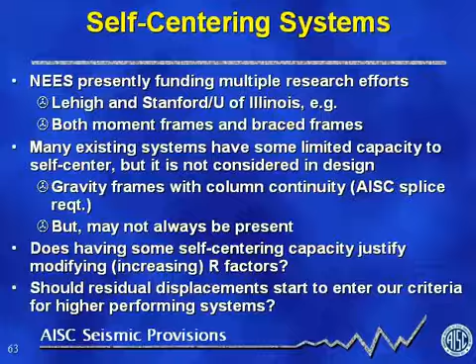Again, what R factors should we use? Can we go above the sort of glass ceiling of an R of 8 if we've got all these bells and whistles put into our system? And then how do we deal with all the other parts of the higher performing systems? A couple different approaches to these have been done.

The slides on the right are moment frames with self-centering elements in them, in this case post-tension strands that have an ability to pull the frame back. The nonlinear response is taken up in angles at the top and bottom flange to take the rotations of the earthquake, and there's an ability of that post-tension frame to pull it back. One key thing about these systems is they have what we call a flagpole hysteretic response—the flagpole is that vertical piece that is the self-centering piece at the end that brings you back to plumb.

The slide on the left is the work at Stanford and University of Illinois at Urbana-Champaign, where the yellow elements in the center are the sacrificial, ductile elements that are going to take all the deformation demands of the earthquake.

And then we've got two rocking frames on either side with vertical post-tensioning at the center, which are the black elements between the red braces that would have a tendency to bring you back to plumb. So some concepts, I think, for the future and for true performance-based and immediate occupancy types of designs.

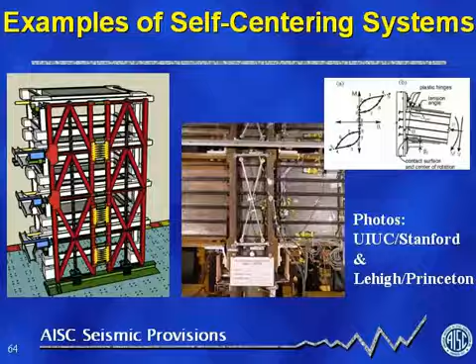Some other systems I call mix and match. Right now, if you declare that you have a special moment frame, the entire moment frame has special moment frame connections. If it's an eccentric brace frame, all the links are ductile, or special concentric brace frame, you've got all special concentric brace frame braces. It's unlikely when you do demand analysis using nonlinear response histories that all of those connections are going to have similar levels of demand on them. In fact, some of them are going to be quite low, others very high.

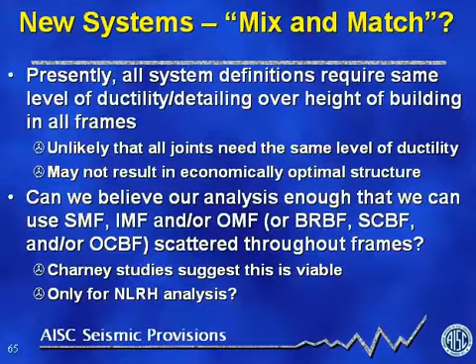But can we get to a point where we believe our analysis enough - and you'd have to do many analyses to verify this - that we could potentially, say in a moment frame system, have some connections that are special, where we think we're going to have the real high rotation demands, some that are intermediate, and some that are ordinary. There's obvious realization of economic benefits from being able to do that. Finley Charney at Virginia Tech has done some work on this that suggests it's viable. It's obviously going to be, at this point, required to do nonlinear analysis to demonstrate that. But that's, again, an idea maybe for the future.

System validation and verification: FEMA 695, which is now available, is based on the ATC 63 document. This is the first time we have a document that will qualitatively let us demonstrate performance of new systems that are being proposed for the code, or for major changes to existing systems. In the past, it's sort of been comparing like systems, the old smoke-filled room approach. This gives us a qualitative, or quantitative, basis to do that.

Some of the key things that are going to have to go forward: how do we use this document, how to establish these provisions or these new provisions, who's going to accept it, how are they going to go through that process. So those things are going to be worked out as new systems come forward.

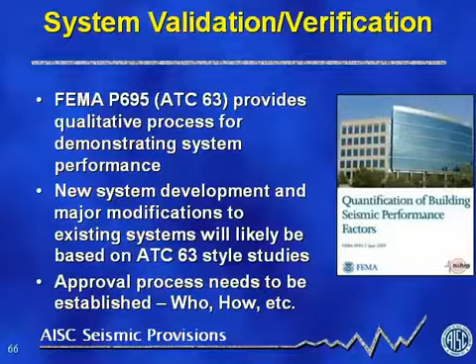So just to wrap up then, documents that you need for seismic design with AISC and steel: the 2010 provisions are available via download, AISC 341. That pre-qualification connection standard is 358, also available for download for free if you're an AISC member. And then the main specification, AISC 360. There's also the Seismic Design Manual, first edition completed a few years ago and available for purchase, and the 2013 edition is being worked on.

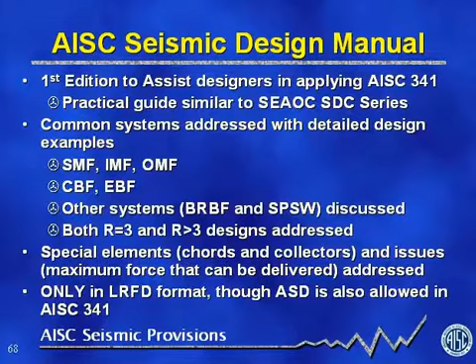I would suggest that you consider the design manual. It has some nicely worked out examples for different systems, including R=3 systems for lower seismic zones, goes through connection design, etc., in a very complete and rational format that you can follow. I think it's a useful document if you're just getting into seismic design of structural systems.

So I think just to wrap up then, we do have this single point of responsibility to eliminate duplication and confusion in seismic provisions now that allows us to incorporate new information as quickly as possible. We think the 2010 provisions will help us move forward and clarify, streamline, and make more transparent the documents. We also have updates including the AWS D1.8. We will continue to try and improve the provisions in the future, and new systems will be brought forward, new performance, and lots of analysis. As the computer programs get more and more robust and fast, we're all going to be doing more analysis than we've done in the past. And we do definitely want your input, recommendations, and to improve the provisions in the future. With that, I thank you.